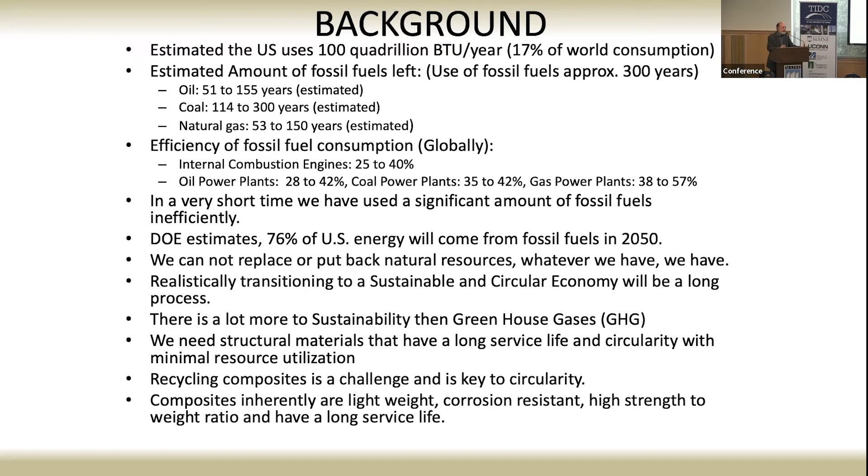Just some sustainability factors, right? Air is important to us, we breathe it. Greenhouse gases are a problem, something we can really understand we need to do something about, the CO2s. Water is also a basic necessity that we need, and we have less and less potable water, but you'd be surprised in an LCA analysis how much water we use as part of the manufacturing process. We'll look at that as we look at an LCI later.

Natural resources, once we take them out of the ground, it's tough to put them back. It took a long time for those things to grow and generate, hundreds of millions of years. So we have to be very cognizant of how we use them and think about in our designs how we can extract them back out after that product is at the end of its life cycle.

The energy we use, right? We use energy to make all these products, to transport them in the manufacturing process. That's all part of the LCA assessment of how we use those energy products. And efficiency, right?

How efficient are the processes that we use to make that? So we make the best use of the resources. And one thing we've talked about a little bit is time. And one thing that we certainly excel in from a composite standpoint is a longer service life. That'll have a significant impact on your life cycle assessment over time. The thought of a 100-year bridge makes a big difference compared to a 70 or 50 year lifetime bridge made in steel. That has an impact on your LCA.

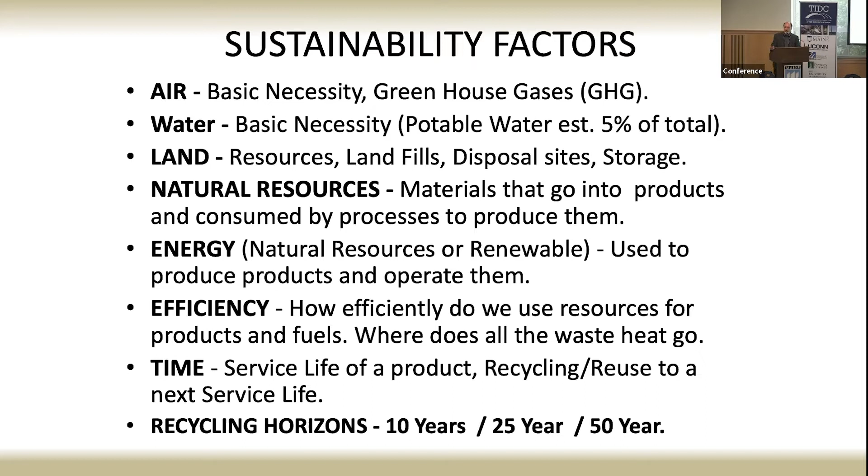Okay, so a chart here I've been developing the last 10 months, and it actually gets a little distorted as I put more information in it, because so much has happened in the last 10 months in terms of critical mass and other forces besides LCA, LCI, which I put in the middle. We have the blue squares that make up all the different aspects that LCA, LCI will play a part in, but eventually we want to get to that circular economy.

So just going clockwise quickly, because we don't have a lot of time to go through everything. GWP, global warming potential, that's your greenhouse gas, and there's a whole system there to evaluate that and look towards net zero. That's a very complicated subject in itself, to really attain a net zero, but there's a lot of activity there.

There's a supply chain we need to get to a circular economy. And oh, by the way, now there's a global recycled standard, ISO, that if you're processing materials and you're going to recycle them, whether it's food, textiles, or whatever, there's a standard you have to meet in order to globally trade those recycled products.

There's the ESG, I'm sure you've heard about it, environmental, social, and corporate governance. There's a lot of activity at the corporate level to change their whole thinking and philosophy, putting sustainability very much at the top, where we have sustainability officers at most corporate institutions now. In there are carbon credits.

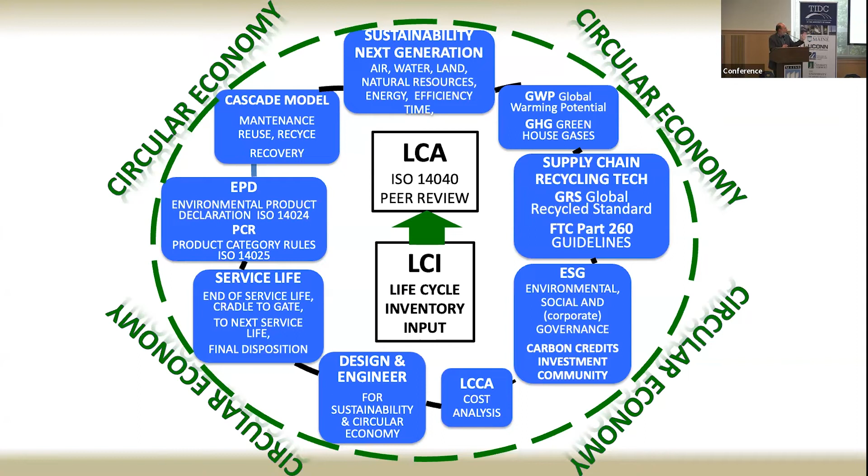The EPD and PCR, lots of acronyms there, all pile up into things that are on the table, certainly being done by the European community and requirements, and the European Commission saying what those levels need to be, greenhouse gas or whatever. So there's a lot of pieces here. We can do something if we take a look at LCI, LCA, design and engineer for sustainability, long service life, and of course we're going to have to look at the costs.

So what does an LCI look like? It's not a three-headed monster, it's pretty simple. There are raw materials which make up a big part of your final LCA analysis, and the LCI data itself, the raw materials themselves, where they come from, how they get to you. Any manufacturing process in the beginning, whether you're building a girder or compression molding, that goes on, and there's energy requirements that come into that.

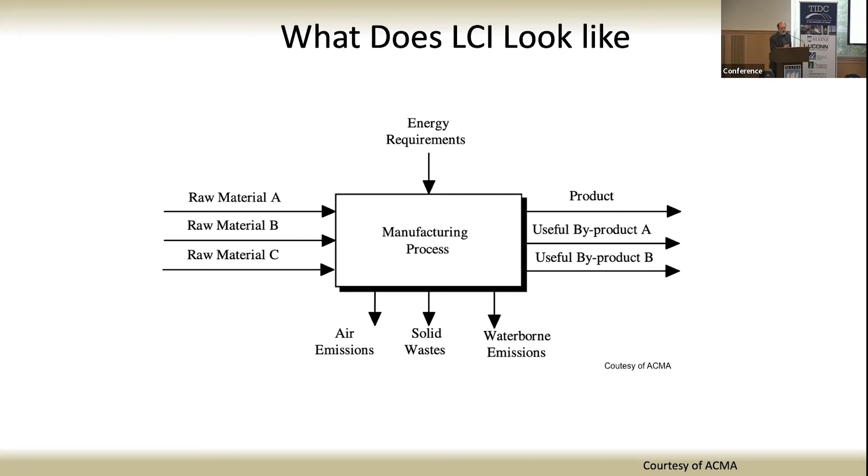And then there's the outputs, right? You're going to make a product that goes out. You may have some useful byproduct from your process that can possibly be recycled and put back into the system. You may have several, but at the same time you have air emissions, the greenhouse gases, and a whole laundry list of different gases that you could be producing that all make up that greenhouse gas effect. You have solid waste and water waste. Like I said before, you'd be amazed how much water we use in manufacturing.

So let's take a look. This is an LCI data sheet out of the 2012 LCI report that ACMA did. Now we get into the weeds here and the nuts and bolts, and we're just looking at a compression molding process. It's not the raw materials, which is the largest part of the LCA and the LCI - that's the big part, that's where a lot of things happen.

But just to take a simple part of it, compression molding - your compression molded part, this is based on a unit of 1,000 pounds. We could have done a pound, could have done 1,000 pounds. They used 1,000 pounds to put some kind of reality into it. I'm going to make a batch of 1,000 pounds of compression molded parts - it could be 1,000 pieces, could be 10 pieces.

But in addition, here's your inputs, right? These are all the material inputs that have come to that compression molding, and it gives you the pounds. And then at the bottom is the water, 53.5 gallons in a compression molding process to make that part. If you look at the raw materials, the same kind of LCA, you'll see much greater amounts of water for that processing. We only got 5% of potable water.

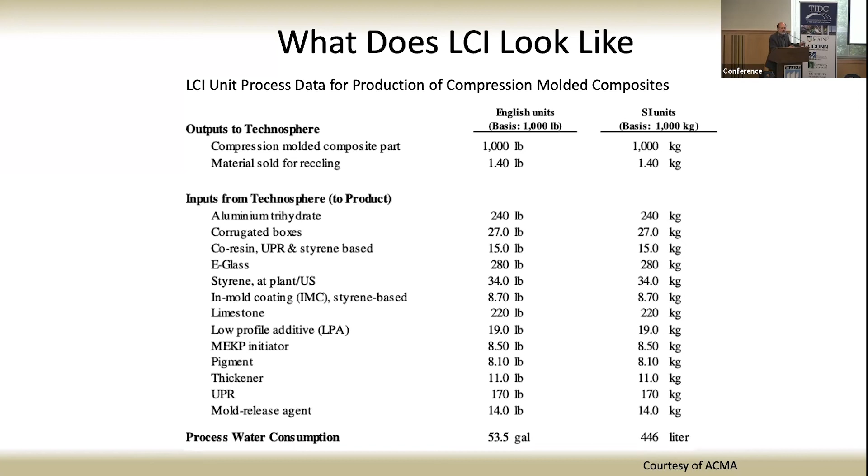You've taken the raw materials, you've got all that LCA, LCI work, you've compression molded it, you've put it on the gate, but now what's next? That's going to go out into its service life. And what happens when that is over? Where does it go? We have to think that through so we can have a whole - that gets you to the circular economy. So the longer that thing is in service, that product - let's use a 100-year girder - if we can extend that, maybe that 100-year girder will go 150 years. We don't know that yet. Be nice to have that science behind it.

Say, you know what, knowing what we know 10 years from now, that bridge is going to go 150 years. But if we've also built in the end-of-life story for it and can recycle it, unzip it in the final analysis, we'll get the most out of those resources.

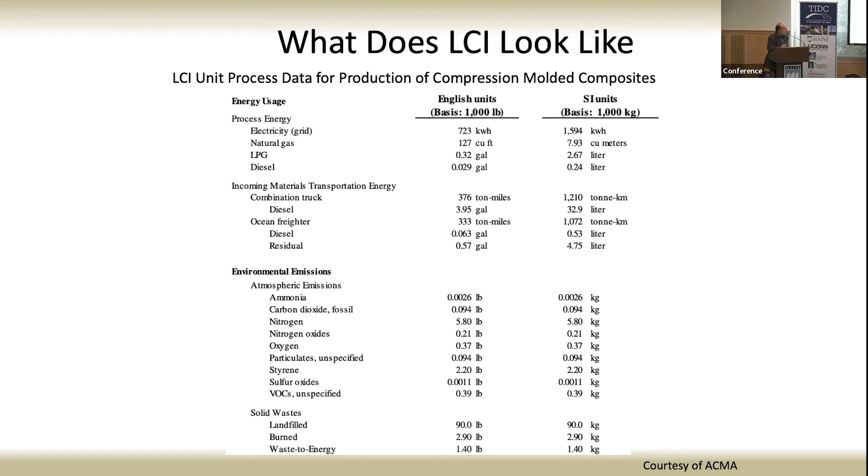Okay, I'll make this one. I won't go into a lot of details on this, but just wanted to show you the steps.

We can start doing LCI, right? You can do LCI on a software package to get a sense of it. There are companies out there and resources that can do an accredited LCI, LCA, so you can follow this pathway toward a peer-reviewed LCA.

If I do an LCA and John Busel does an LCA, maybe we use the same software, but if we use different assumptions, in terms of what I just showed you, we're going to come out with two different results. So somewhere we need some body of experts to look at our two LCAs, LCIs, and put them in perspective in terms of being credible.

Maybe John did a better job than I did. We do compete on certain things when it comes to composites, but okay, he does a better job than I did. Why was his better than mine? What group accredits that? So when you look at the 100-year bridge beam, where do you get the credibility that says you did an LCA in a way that is credible?

We need credibility for the LCA work we do. If I do it on a software and if I do it in a spreadsheet and put it together, how do I know I have all those factors we looked at in the LCI, just to start, before we go to the LCA?

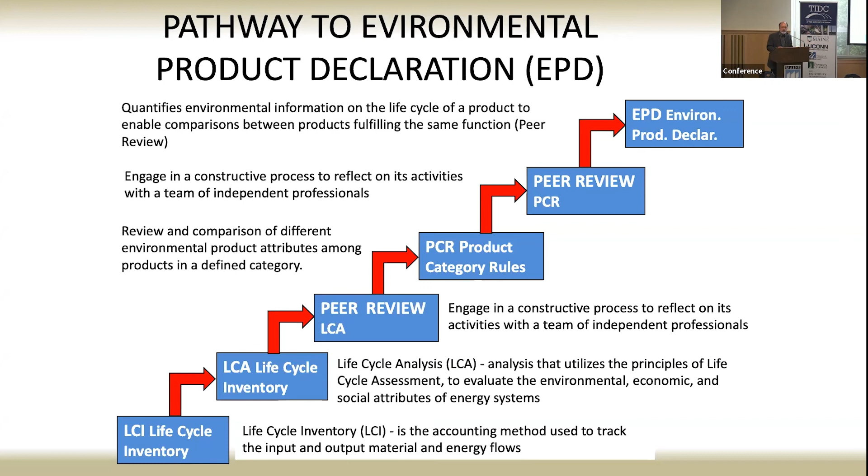If we want to compare to steel, how do we do that? Well, again, we can go back to some basic software and go through that. I'm running out of time, so I have to wrap this up, but you can see it gets fairly complex. Again, we can start with LCI, LCA, make some analysis, make some judgments in comparison to our structural analysis, and how we should proceed from a sustainability and circularity standpoint.

Okay, finishing up here. Sustainability is about the next generations. Whatever we do today is going to affect the next generations in terms of resources and environmental impact. But sustainability is an opportunity for composites to grow. We know they're inherently sustainable. They last a long time.

But sustainability and looking at circular economy can be an advantage for us to push forward. Realistically, it's going to take time to transition to a sustainable and circular economy. It's not going to happen in a short time, and it should be a part of product design. LCA, LCI analysis should be part of that process, and LCI, LCA is a tool.

Recycling of composites is a long-term commitment. The industry has made that commitment now and is putting money towards that. As we talked about those horizons, they're definitely out there. We just have to find the technology to incorporate it and make those things happen, but the technology and the horizons are there.

There are many aspects of sustainability. As you saw in that chart, it's not just one thing. All of those are connected in general in some way. It's time for us to think beyond the business case. We typically look at the business case, and I heard from the commissioner that it's all about the cost, how do I use those resources. I took a less better solution for a couple of bridges, but I got to do more bridges for now. That thinking we've got to change.